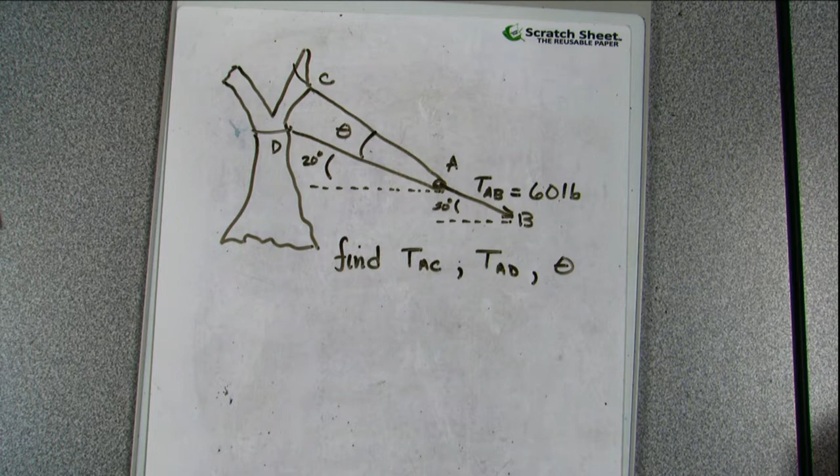That's odd that they don't accept that thermo class, because that one is pretty brutal. The reason is it's a historic thing. UCO doesn't accept it because UCO used to be only a physics-only department, and thermodynamics in physics is a junior-level course. Actually, you'll find that some institutions do two thermodynamics courses in their engineering program. They do the one that's equivalent to what we do as a sophomore, and then they do either a junior or senior level thermodynamics class, particularly if you're going into chemical engineering. You'll end up with two or three thermodynamics classes, plus a graduate one. So thermodynamics is a big part of chemical engineering. Sorry, guys, but it's an artifact of history that the engineering program at UCO has a 3000-level thermodynamics course, because they still graduate a number of physics majors, and there is no 2000-level thermodynamics for a physics major. So that's the fundamental reasoning behind it, and it works. I don't know how much harder they can make it.

That's pretty brutal. Thermodynamics is fun. It was fun, it was. Yeah, thermodynamics is fun. It's all about boundary conditions, and the boundary conditions get more and more fun as you get into processes. Yeah, so it's all about boundary conditions.

All right, so the next section in this chapter is 3 dimensions. There's no more theory than what we already have, right? It's the summation of forces in the x direction, summation of forces in the y direction, summation of forces in the z direction. No additional theory for what we're doing.

So I figured what we'll do is we'll work some problems. The review problems will come up, but I wanted to start with one that looks like this. So this is a practical problem. We're going to knock down a tree, right? But initially we're going to be in equilibrium.

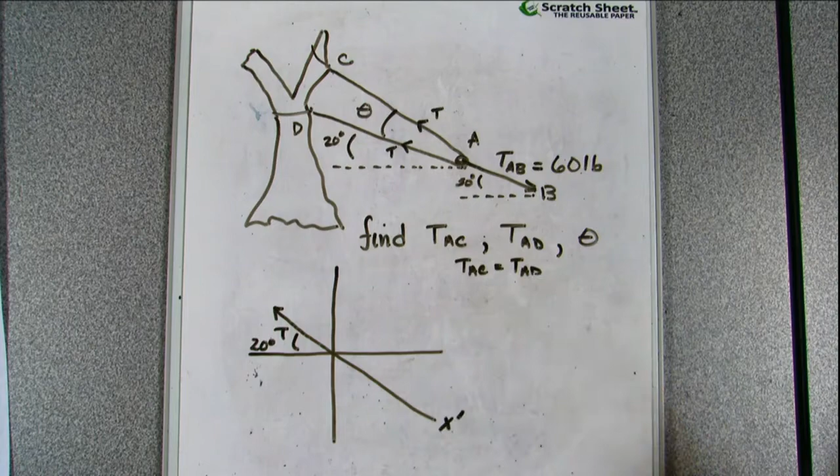And so I'm going to go ahead and put in our... wrong place, sorry. Because if I do this, this is 20 degrees, right? From my geometry, so my pull, one's going to be down here, and this will be 10 degrees. And that will be our pull. So the pull is going to be 60 pounds.

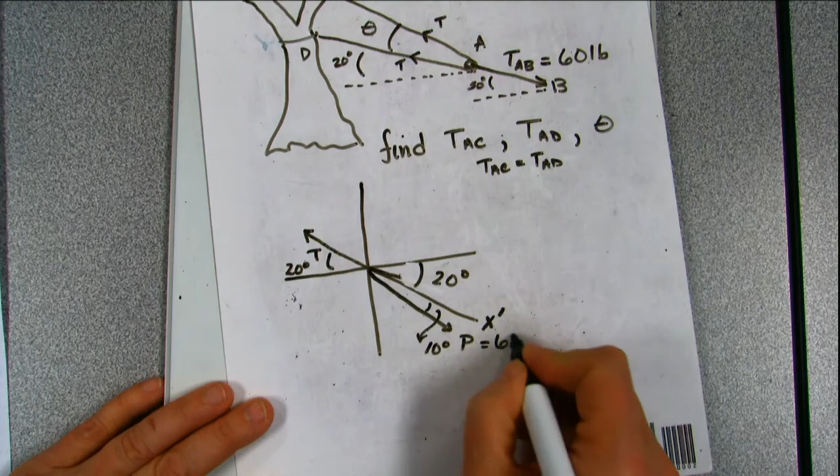Then we've got the other tension, which is someplace over here, and that has the angle between it. And then that gives us our Y prime. So we've got an X prime and a Y prime. We've just redrawn our picture, and now we can do summation of forces, right?

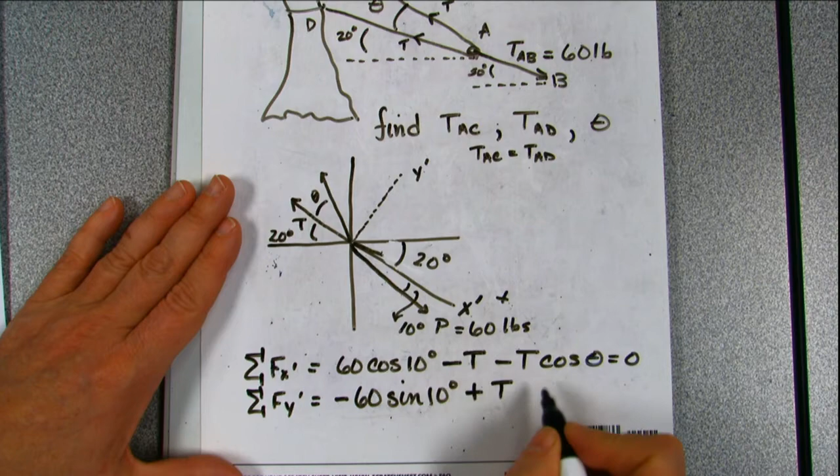So my summation of forces in the X prime is going to be this, and this is going to be my positive side, so this is my 60 pounds cosine of 10 degrees. That's all in the X direction, so that makes life really nice. And then the other one is T cosine angle, and that all has to equal 0. Then the summation of forces in the Y direction is going to be negative 60 sine 10 degrees, and then it's going to be plus T sine angle, is equal to 0.

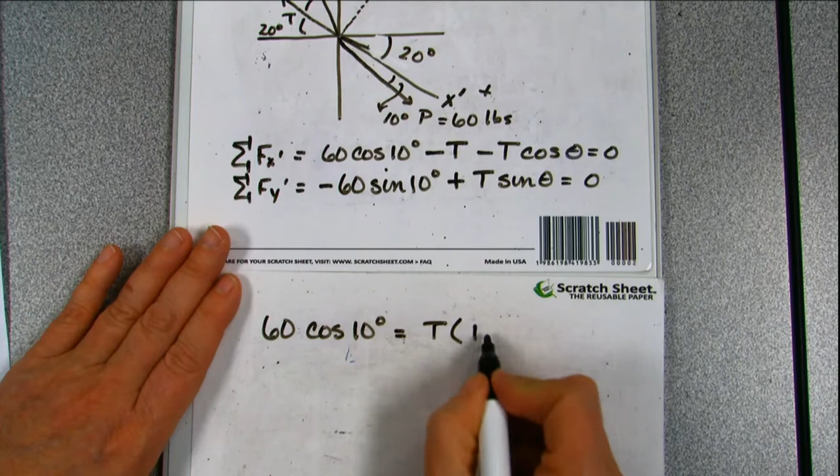Two equations, two unknowns. So I end up with 60 cosine 10 degrees is equal to T1 plus cosine of the angle. And then I've got 60 sine 10 degrees is equal to T sine of the angle.

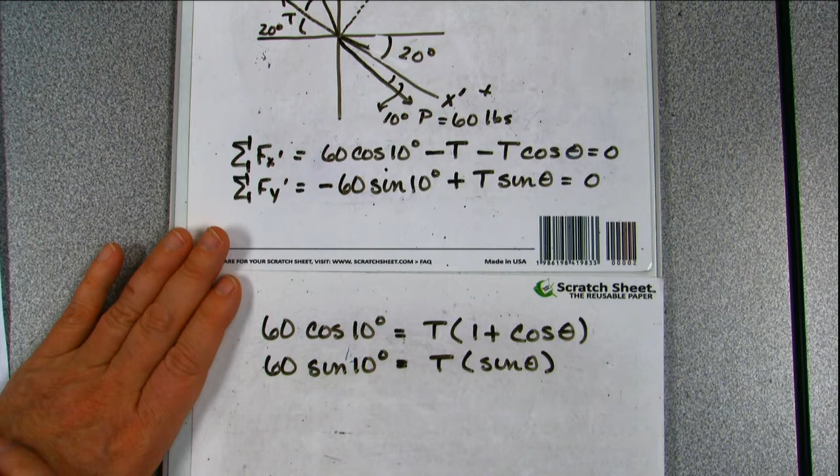So I can do one of two things. I can solve for T and substitute that in, or I can use a trigonometric identity. Let's go ahead and do the solve for T approach and see what we get.

I'm going to calculate 60 cosine 10 and 60 sine 10. So this is 59.1 is equal to T, 1 plus cosine of the angle. And 60 sine 10 is 10.4, equal to T sine of the angle. So 10.4 divided by sine of the angle is equal to T.

And then we get 59.1 is equal to 10.4 divided by sine of the angle, times 1 plus cosine of the angle. And it looks like no matter what we do, we're going to have to use a trigonometric identity.

And the trigonometric identity that the author uses is 1 plus cosine of the angle is equal to 2 cosine squared theta over 2. You can play with whichever trigonometric identity you want to use to get there, but that's what the author used.

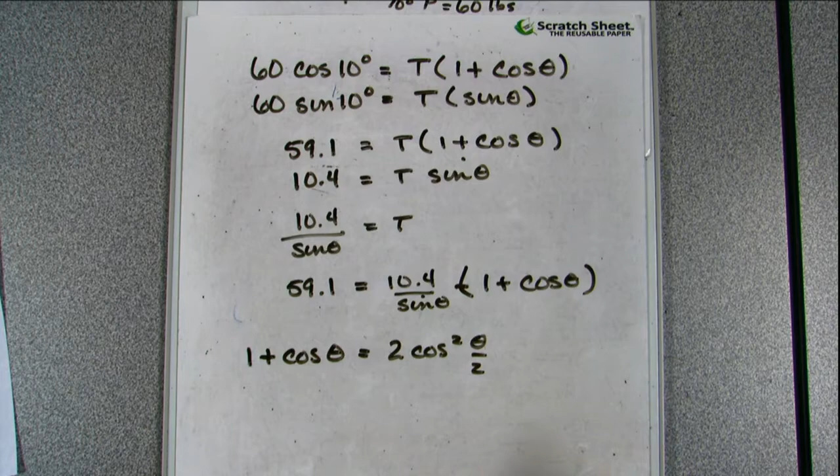And then also used, so for that one, used that one. And for this one, they went ahead and used sine theta over 2, cosine theta over 2.

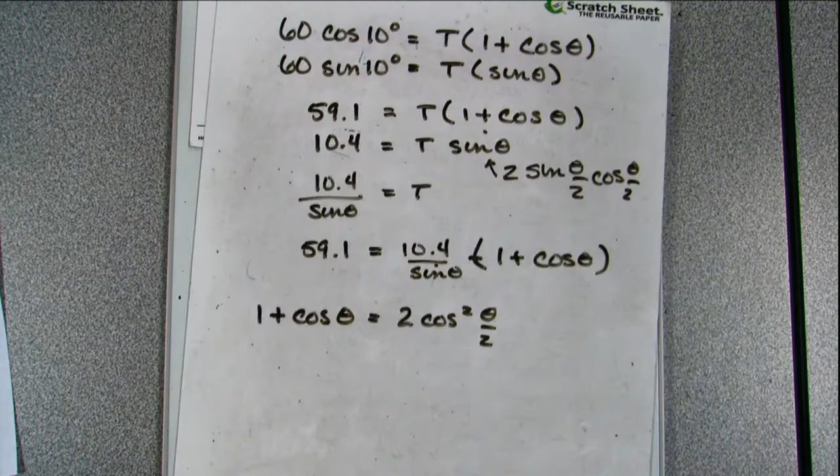So I get 59.1 is equal to 2T cosine squared theta over 2. And then I have 10.4 is equal to 2T sine theta over 2 cosine theta over 2.

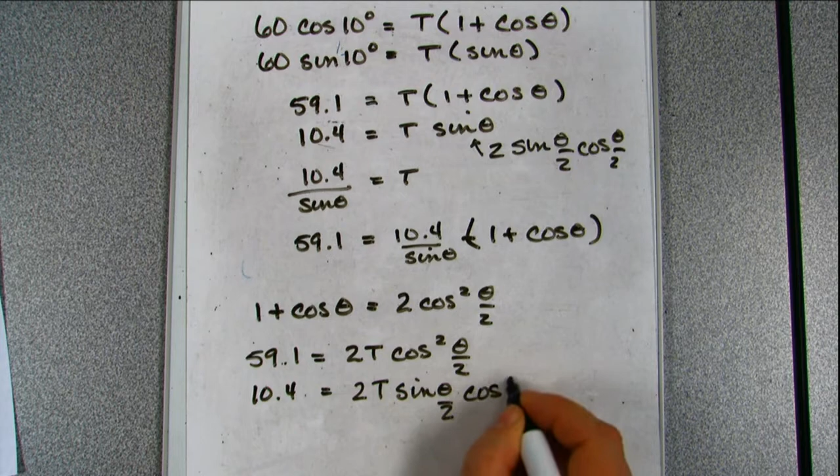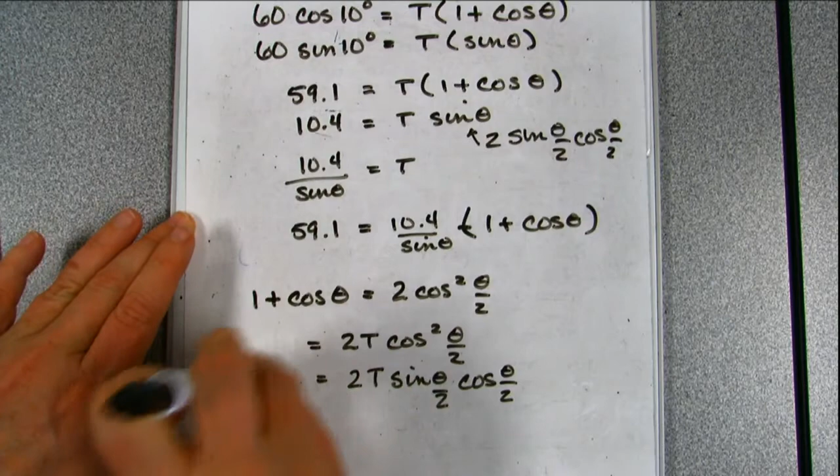I'm going to go ahead and put these back in: 60 cosine 10 degrees, 60 sine 10 degrees. I'm going to rewrite it as 60 cosine 10 degrees equals 2T cosine squared theta over 2.

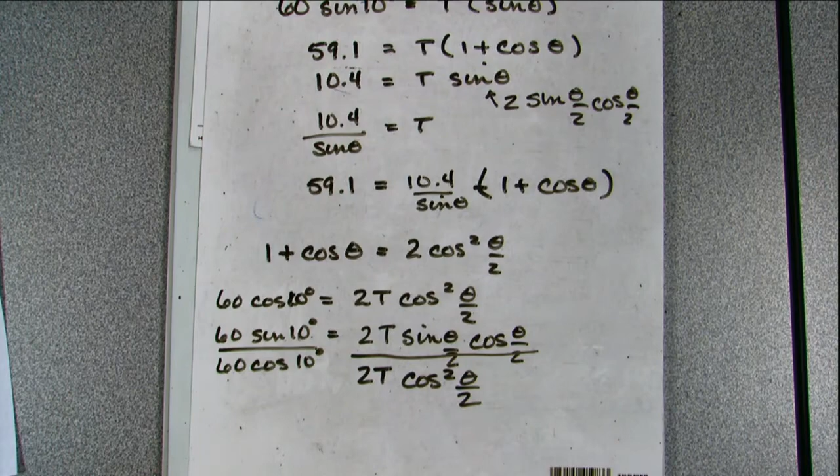Now you see why the author does it the way he does it, because one of these cosines goes away. I end up with the tangent of 10 degrees is equal to the tangent of theta over 2. Theta ends up being 20 degrees. And then T ends up being 10.4 divided by sine 20 degrees, which should be equal to about 30.5 pounds.

That's all right. How would you solve for theta if tangent 10 degrees is equal to tangent of theta over 2? Figure out what tangent of 10 degrees is and do the inverse tangent. Oh okay, yeah, that's how I do it. I was looking at it and thinking inverse tangent of 10 degrees equals inverse tangent of... but then again, you can also do it by inspection, just by inspection. If 10 degrees is here, theta over 2 has to equal 10 degrees, so then it'd be 20. Okay, so you can do that one by inspection.

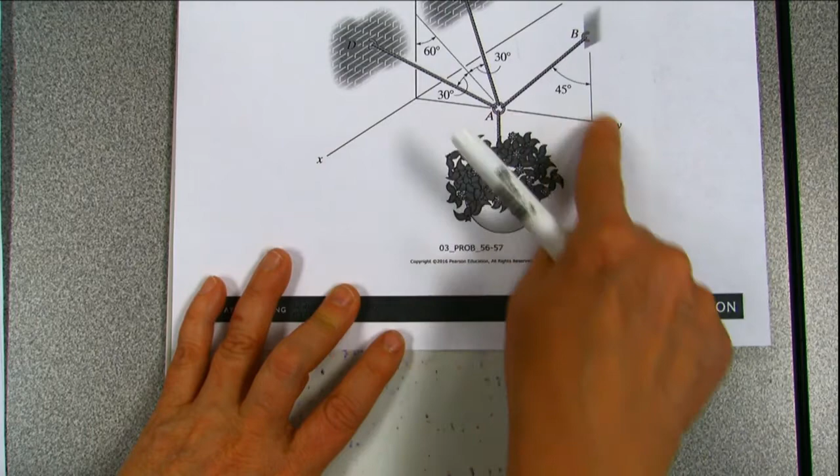Let's look at vector AB for a second. It's just in the y direction and in the k direction. That's going to make life easier, so let's go ahead and write that one down, because life is going to be good if we can write that one down.

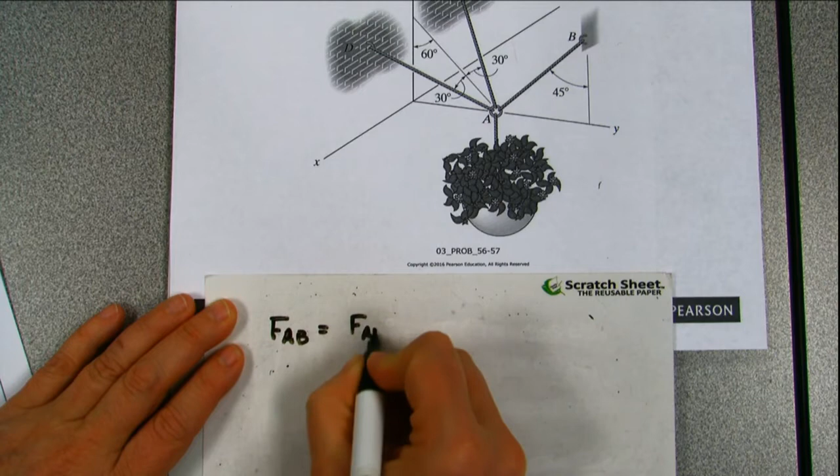So FAB is going to be FAB sine of 45 degrees in the j direction plus FAB cosine 45 degrees in the k direction.

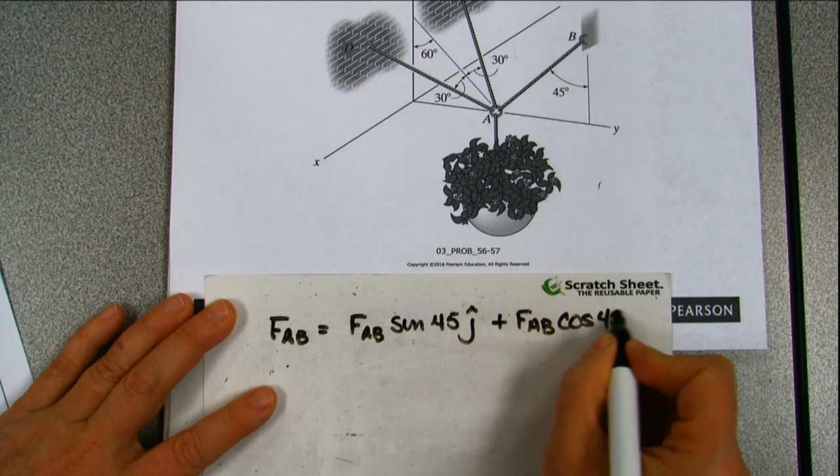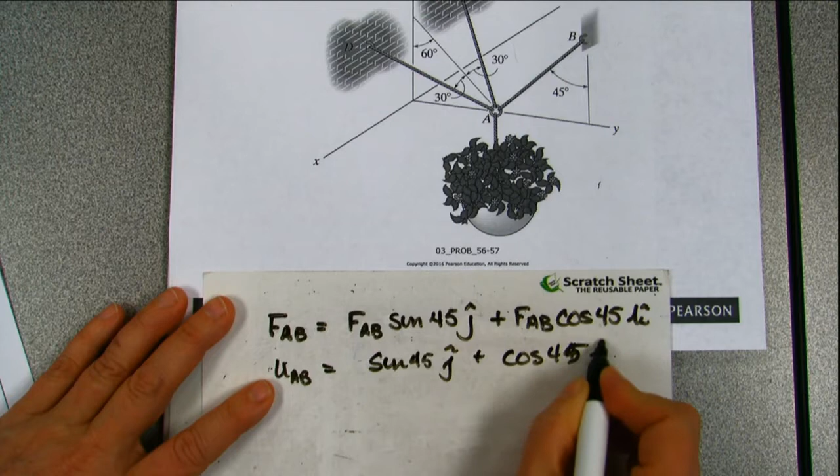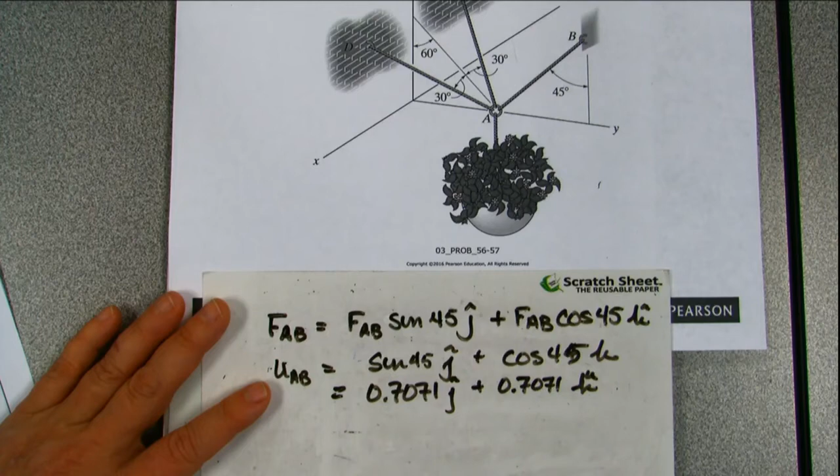And just for grins and giggles and practice, UAB is going to be sine 45 J plus cosine 45 K, just for practice. We don't necessarily have to use that for anything in this one, but by the end of the semester you should remember that cosine of 45 degrees and sine of 45 degrees is this right here. We get used to that.

Now the other two, not so much, because D and C are off of the YZ plane, but if you look at them, they're going to be the same, except one's going to be in the negative X direction, and one's going to be in the positive direction in the Y and X direction.

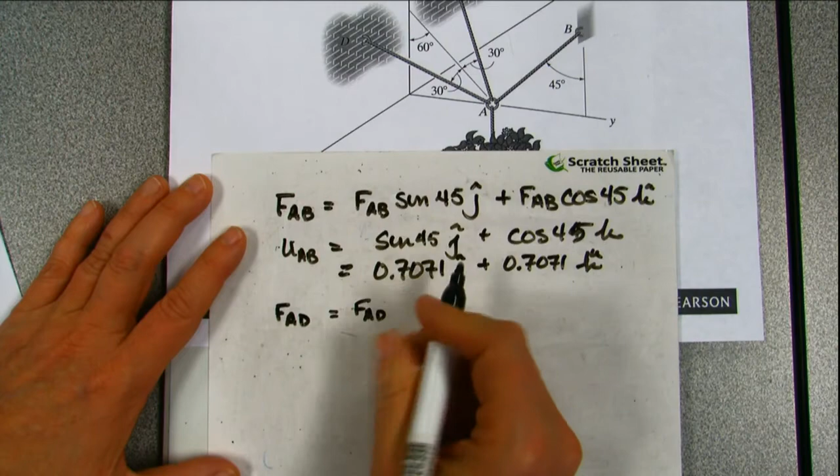So if I do FAD, and this is one of those times you may want to go back and look at it, FAD is going to be, because they've given it to us in these kind of coordinates, I'm going to get the sine of 30 degrees I.

And when I'm looking at these tensions, I want to make sure I've got that. That one's going up, so that's good, this one's going there. FAD minus cosine 30 degrees sine 60 degrees J, and that's plus cosine 30 degrees cosine 60 degrees K.

And the minus comes because we're setting this spot as the origin, even though the picture's not drawn that way.

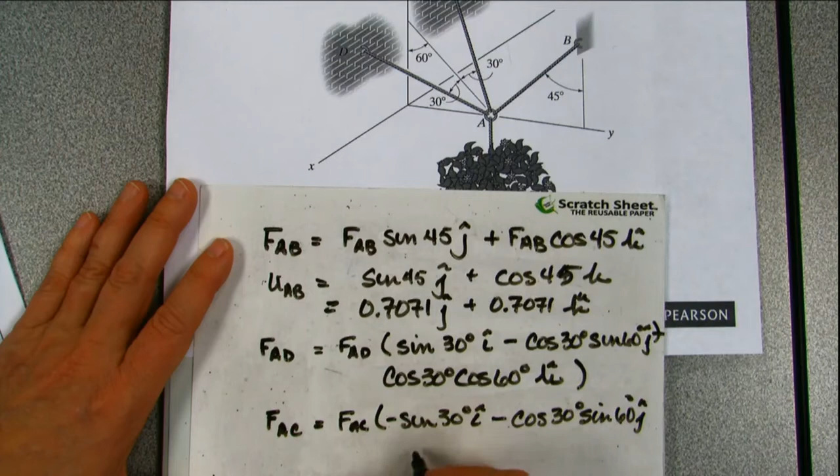And then FAC is going to look a lot like FAD, except FAC is going to be minus sine 30 degrees I, minus cosine 30 degrees sine 60 degrees J, and then we get plus cosine 30 degrees cosine 60 degrees K.

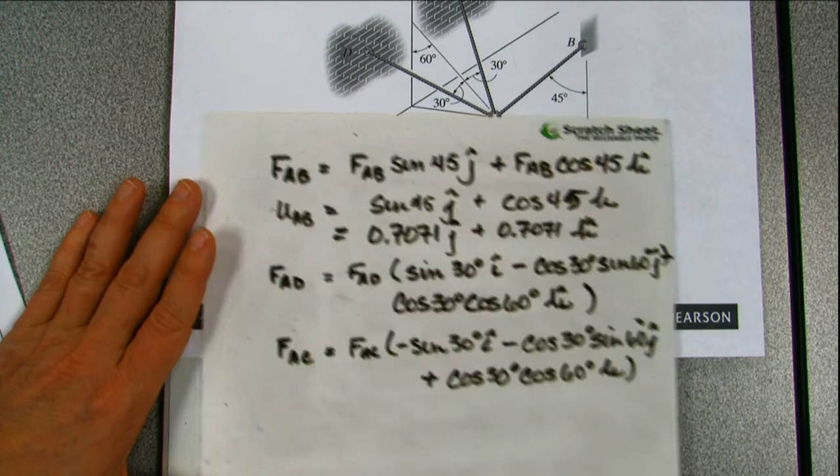So we're going to rewrite these. FAB is equal to FAB times 0.7071 J plus 0.7071 FAB K.

FAD ends up being 0.5 FAD I minus 0.75 FAD J plus 0.433 K, and FAC is minus 0.5 FAC I minus 0.75 FAC J plus 0.433 K. And then we have the weight is equal to 25 times 9.8,

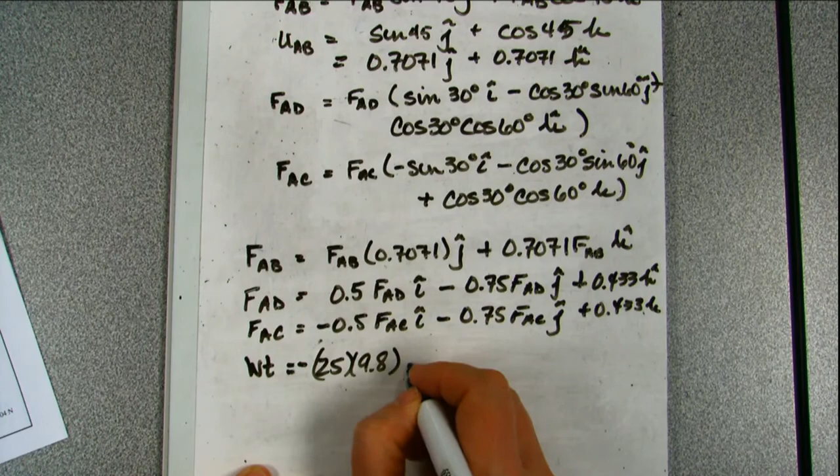times 9.8, and that is negative in the Z direction for the picture. It's negative in the Z direction for the picture, if you go picture there, that way.

So now you just do the summation of forces. Summation of forces in X: 0.5 FAD minus 0.5 FAC has got to equal 0. So FAD has got to equal FAC.

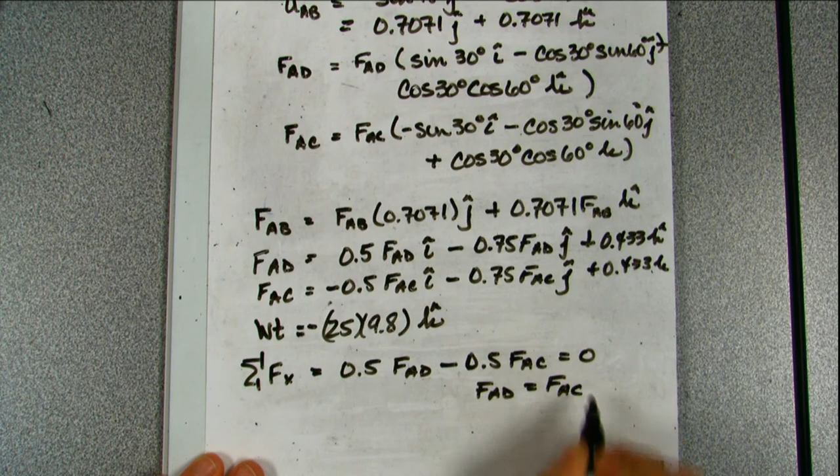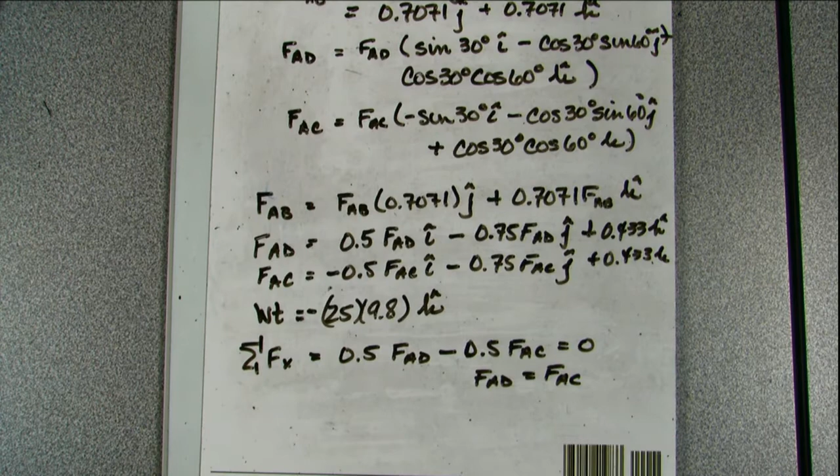That's going to be helpful. Oh no, there was no I in it. There's nothing in the X direction on that one. And so that's also when you start looking at these problems, if you're given a problem that's not like the book problem, pick your coordinate points, because it's going to help you out.

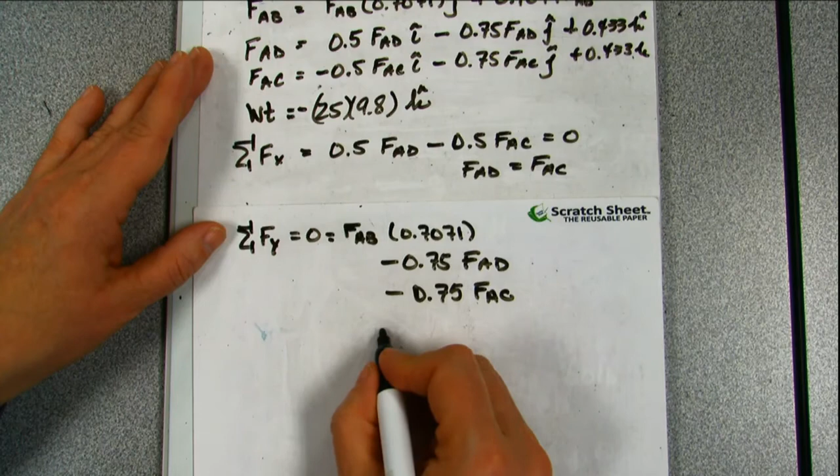So now we do summation of forces in the y direction, it's got to equal 0. In this case we've got FAB times 0.7071 minus 0.75 FAD minus 0.75 FAC, but we know FAD and FAC are the same, and we have a minus, and that works out to be 245, 25 times 9.8. No, that's in the K direction, never mind, we're in the Y direction.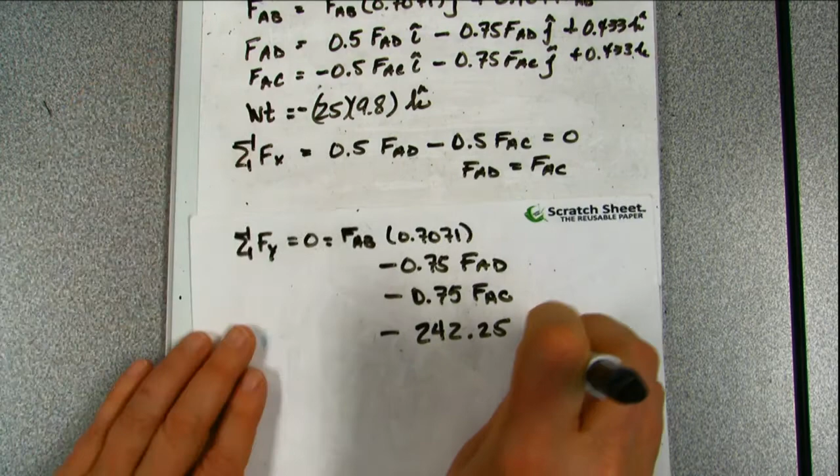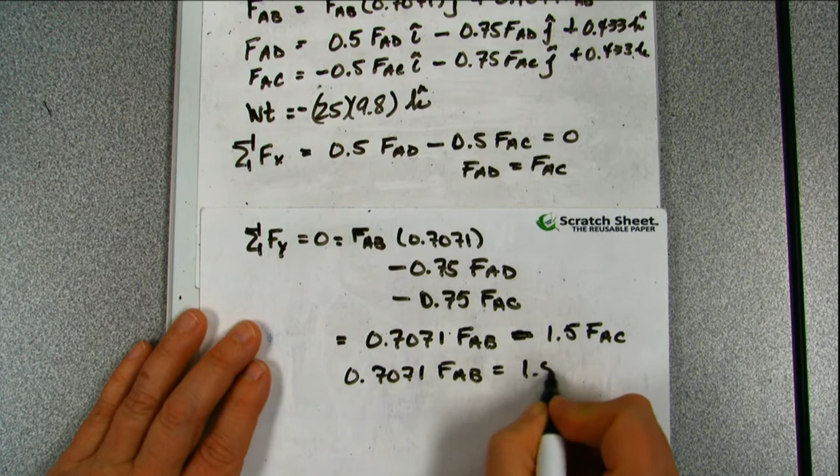So I get 0.7071 FAB is equal to minus 1.5 FAC, just for grins. 0.7071 FAB equals 1.5 FAC. FAB is equal to 1.5 FAC divided by 0.7071.

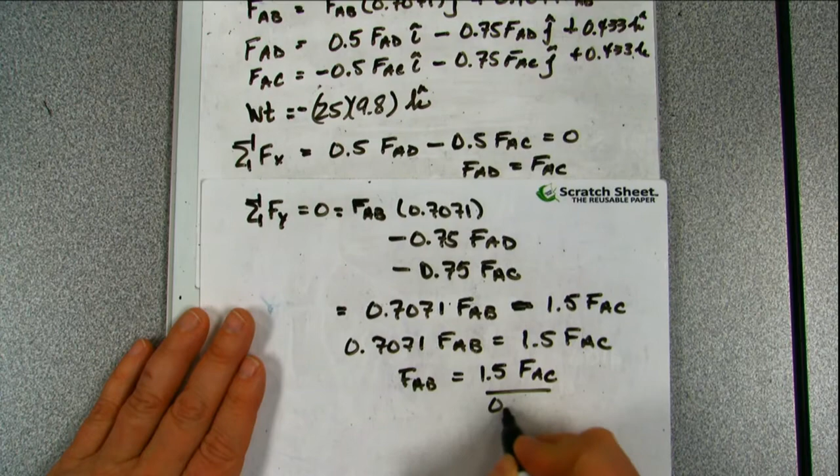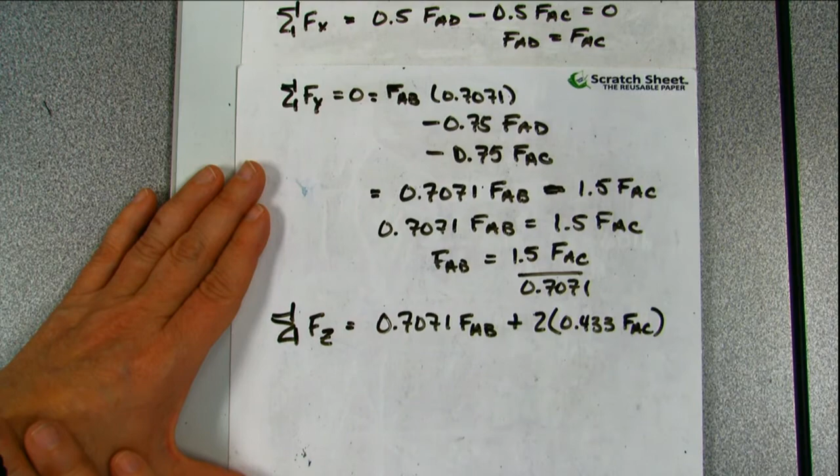Now we do the K equation, and that's 0.7071 FAB plus 2 times 0.433 FAC. Because it's easy, we can go ahead and do that. Everybody see that I got two of those right there? And we know AD and AC are the same, so I just shortcutted a step.

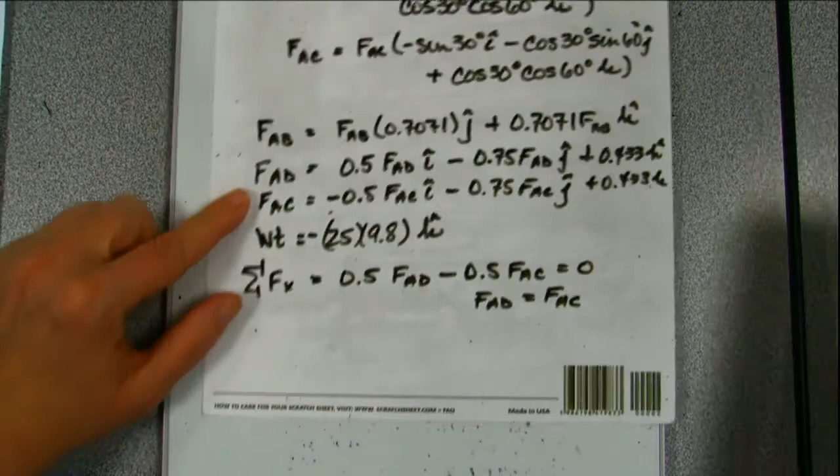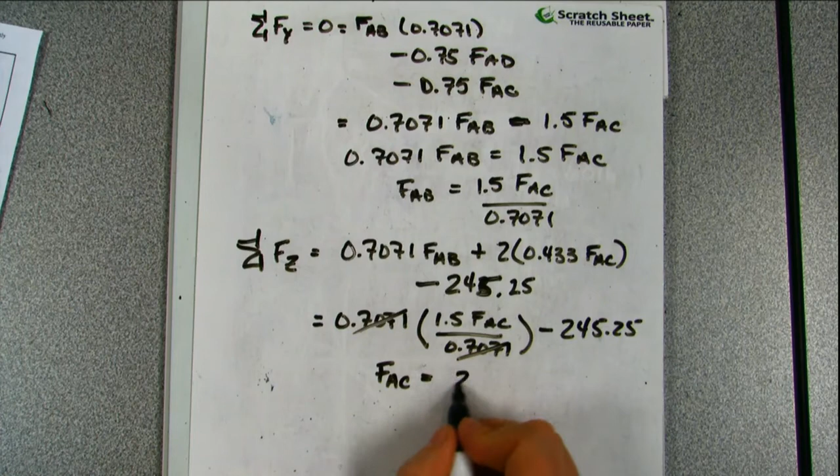That's minus 242, or 245.25. We know what FAB is, so we can plug in for that. That's nice, that makes it nice. FAC is equal to 245.25 divided by 1.5.

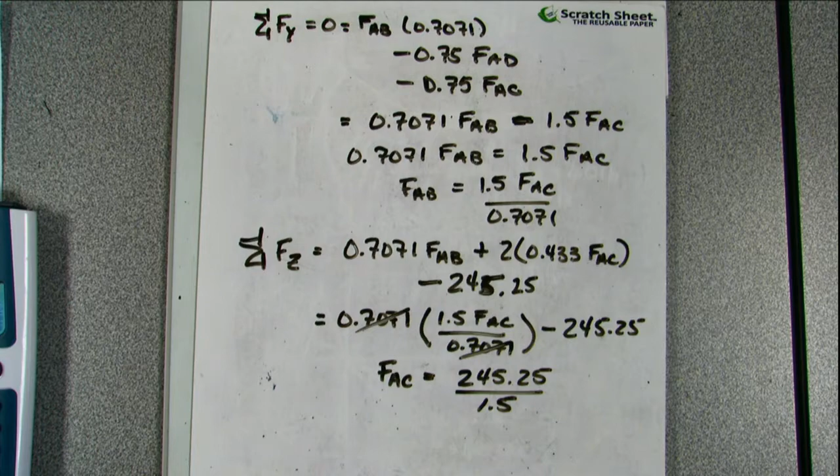What did I do wrong? Oh, forgot that part right there. Wait a second, something's not right. We left out a term.

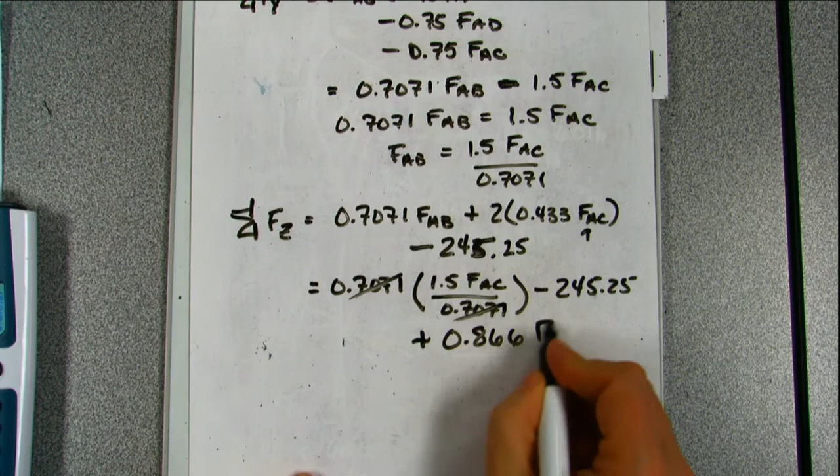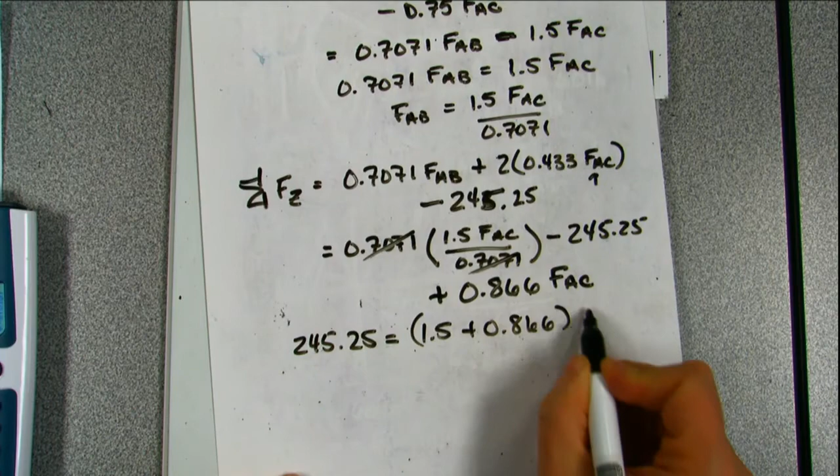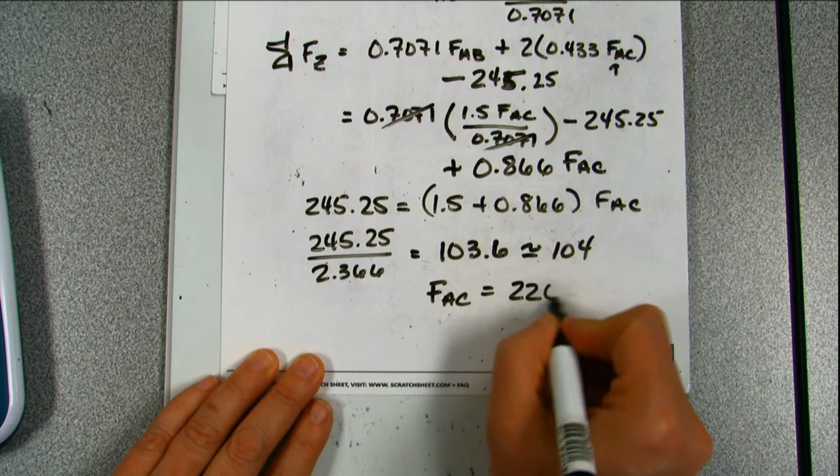So we get 245.25, 1.5 plus 0.866 FAC. We get 245.25 divided by 2.366 gives me 103.6, which is approximately 104. Then we can plug it back into that one. 1.5 times 104 divided by 0.7071 gives us FAC is equal to 220. And those are both in newtons.

Seems like the hardest part is just keeping track of the negatives and the directions. The hardest part is getting the unit vectors. Fundamentally, the hardest part is getting the unit vectors, and you're trying to read the picture. Yeah, that's pretty hard.

And that's fundamentally it, because if you look at this one, we got a traffic light. So we got a traffic light. That's why I said, when in doubt on these things, draw your force diagrams, okay? That's the first thing, draw your force diagrams. And then the next part is draw your unit vectors. So for this one, we're going to take H, given H that's in the middle, is going to be 4 meters. And we want to determine the tension in the cables if the traffic light is 15 kilograms.

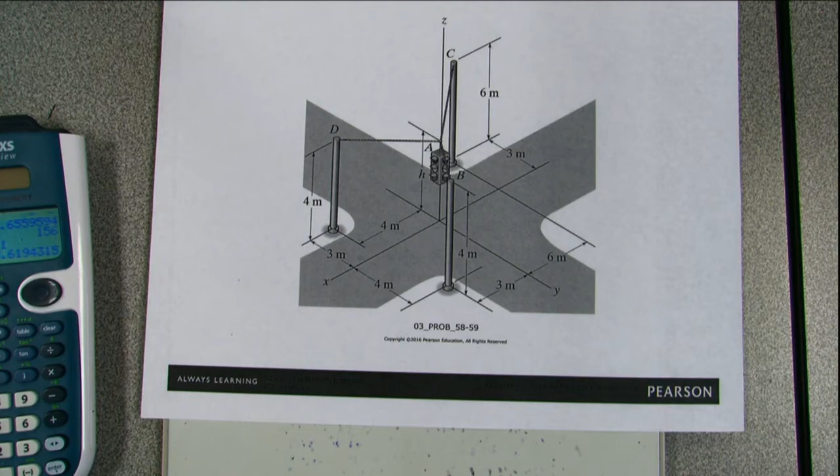So the first thing you want to do is find the unit vectors. So we're going to do AB, okay? We're going to do AB. So what we've got for AB is we know that this is my X direction, okay? We're going to be at the center here. So how am I going to do this?

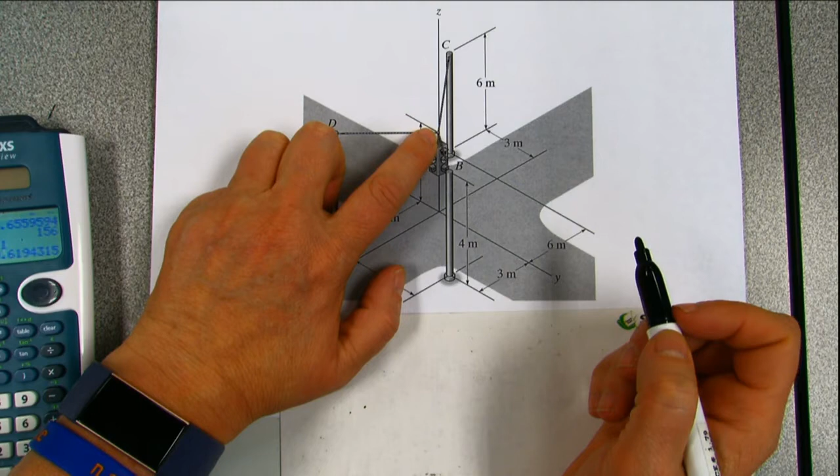How do I do this? I do AB. Okay, if we make this my origin, okay, so there's my origin there. These are at 4, okay? These are at 4 and C is at 6. So that's one of the things that we've got to do. If I make that my origin,

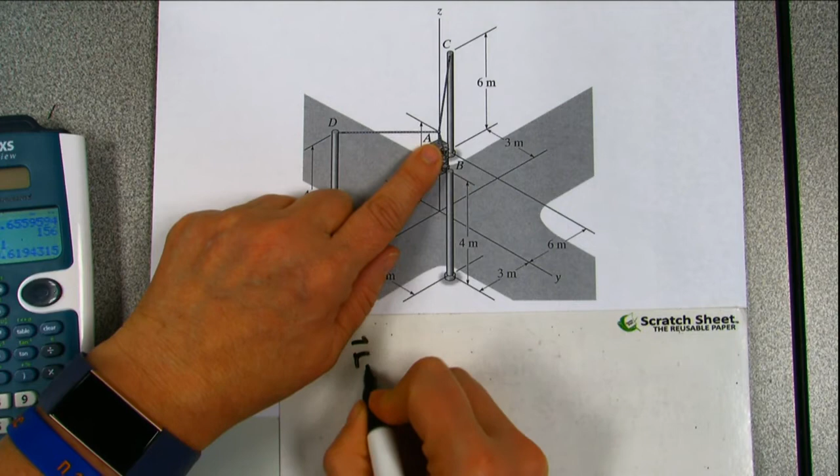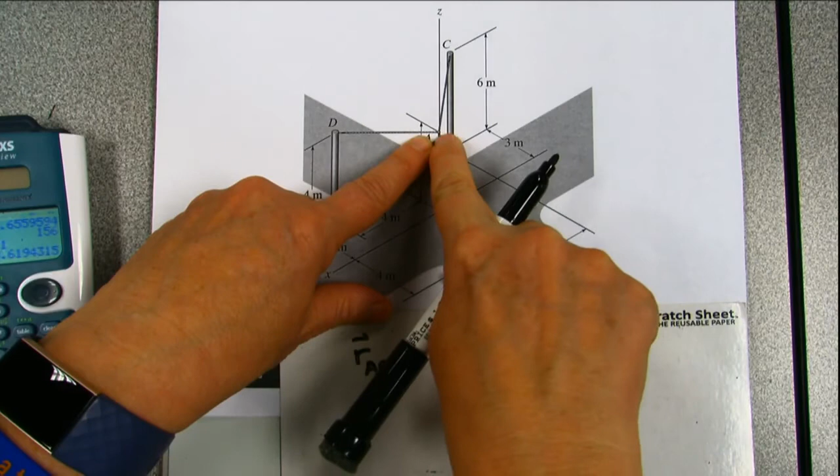RAB has got a 0 in the K. Everybody okay with that? If I make this my origin, these are 4 meters, 4 meters, this one's 6 meters. And if I have that as my origin, that's going to have a 0K. We're not going up or down in the K direction. When I do RAC, it's going to have +2 in the K direction.

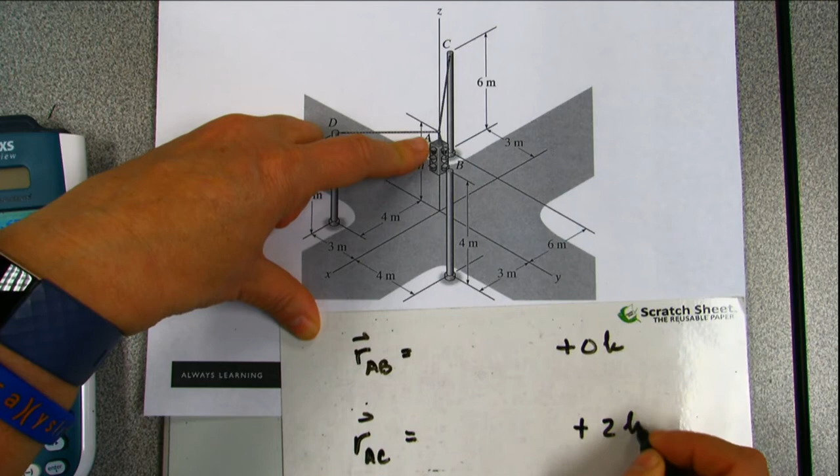And RAB is going to have 0 in the K direction from my picture, if H is equal to 4. I don't have any, and we're given the problem that H is equal to 4. So I don't have anything in the K direction.

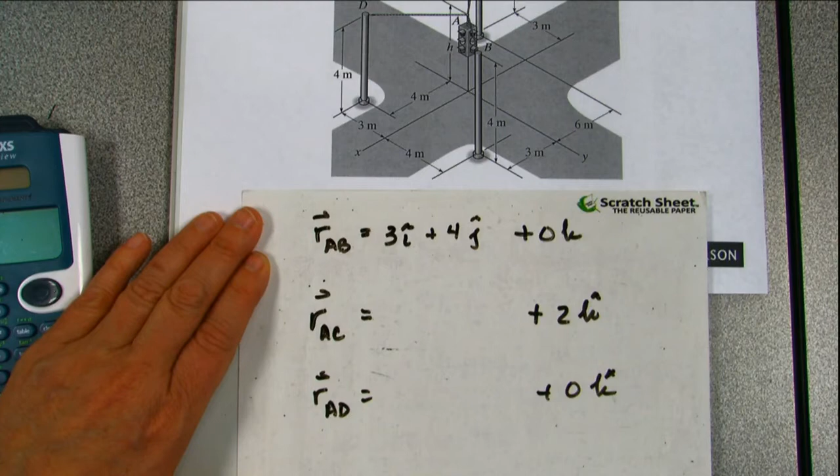Now all R is a position vector in my space. So if I do that, then I have 3 in the I direction, because there's my 3 in the I direction, and I have 4 in the J direction. For RAC, I end up with -6 in the I direction, and I end up with -3 in the J direction. And then for RAD, I end up with -3 in the I direction, and I end up with a +4 in the J direction.

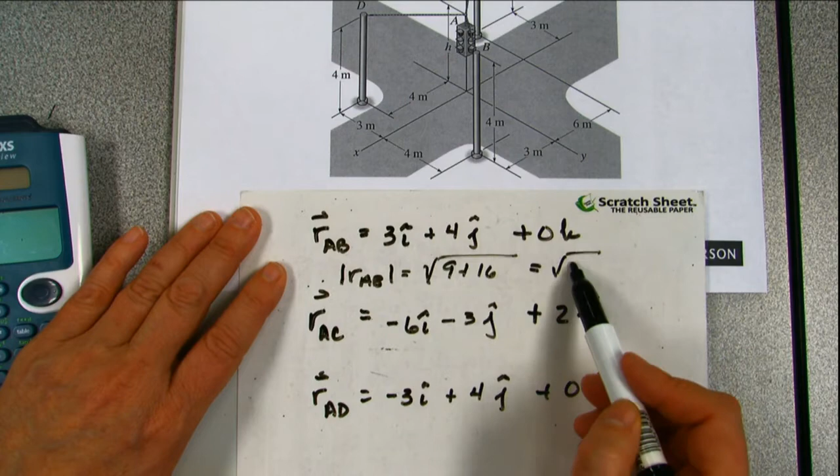So now what I want to do is I want to find the magnitude of RAB. That's the square root of 9 plus 16, equals, did I do that right? Should be. 9 plus 16, 25 equals 5. So UAB is equal to 3/5 I plus 4/5 J.

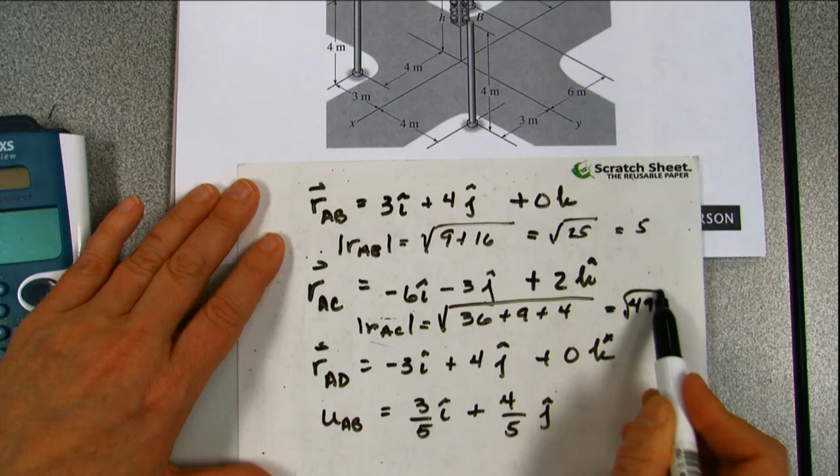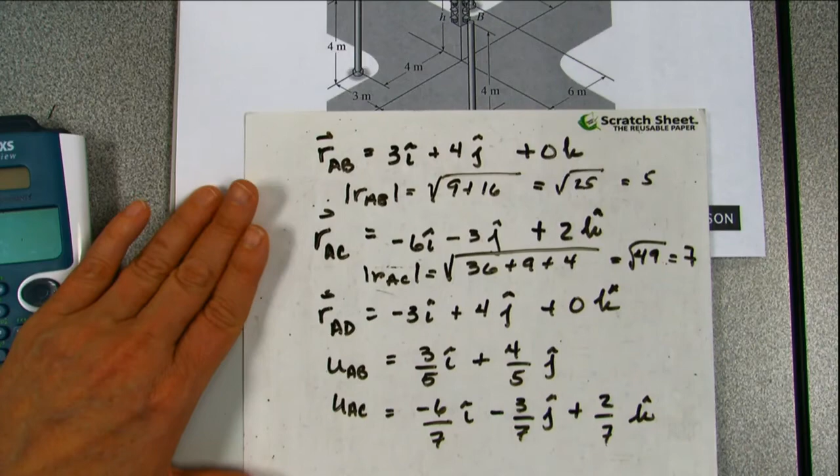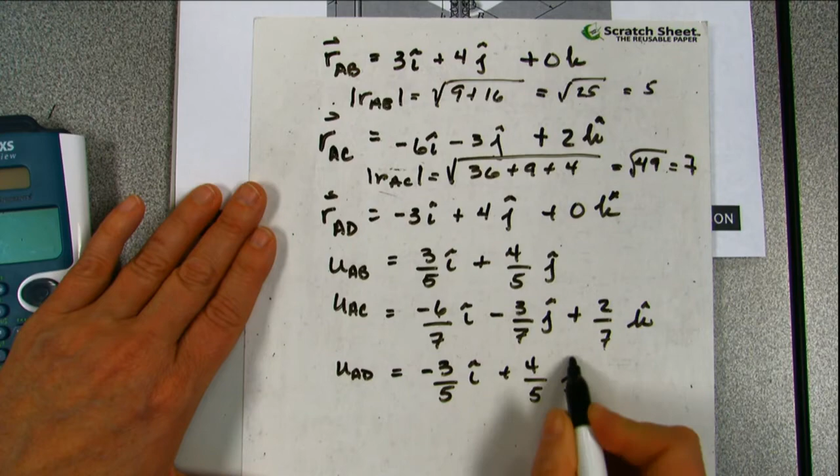Magnitude of RAC, square root of 36 plus 9 plus 4 is equal to 49, which is equal to 7. So UAC is -6/7 I, -3/7 J, plus 2/7 K. That one's 5 again, so that makes life a lot easier. We just have to go in and do it, except that's -3 in the I direction plus 4 in the J direction. So now I've got my unit vectors.

And now you just plug in your forces. So my force vector AB is force AB, UAB, which means it's 3FAB fifths in the I, plus 4FAB fifths in the J. And we do the same for each one.

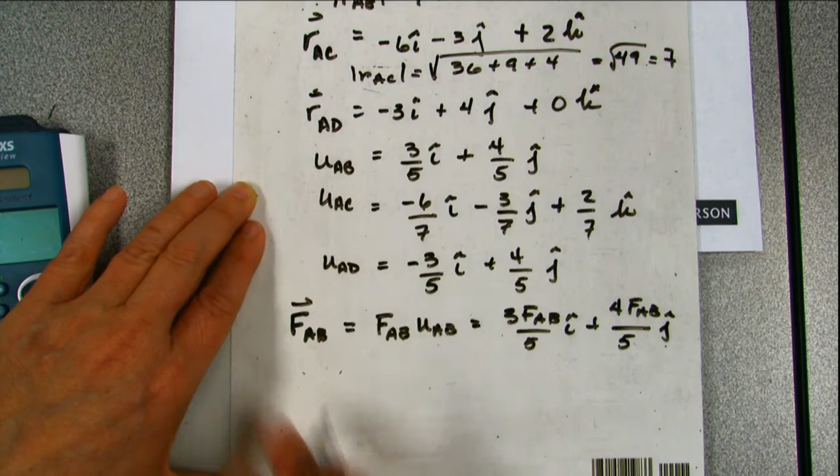And I'll give you the answers so that you guys can work it through yourself. FAB is equal to 441 newtons. FAC is equal to 515 newtons. And FAD is equal to 221 newtons.

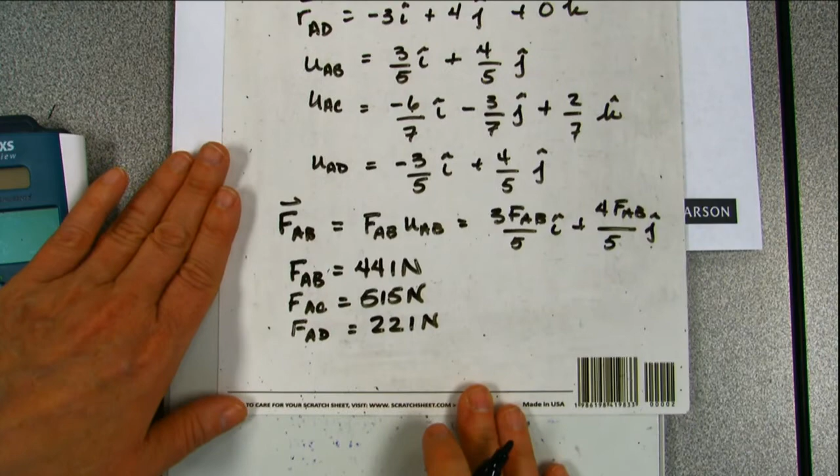Again, fairly straightforward. The tough part is finding the unit vector. The tough part's going to be finding the unit vector for each of those vectors.

Would we figure the tension by starting with the weight of the traffic light? Yeah, because you've got these are the 3 cables here, but you do have the weight of the traffic light going down. And we don't have any of the tensions in the cables, but you know that that's 15 kilograms. So you do sum of your components in the X direction, sum of the components in the Y direction, which means you have 3 equations, 3 unknowns.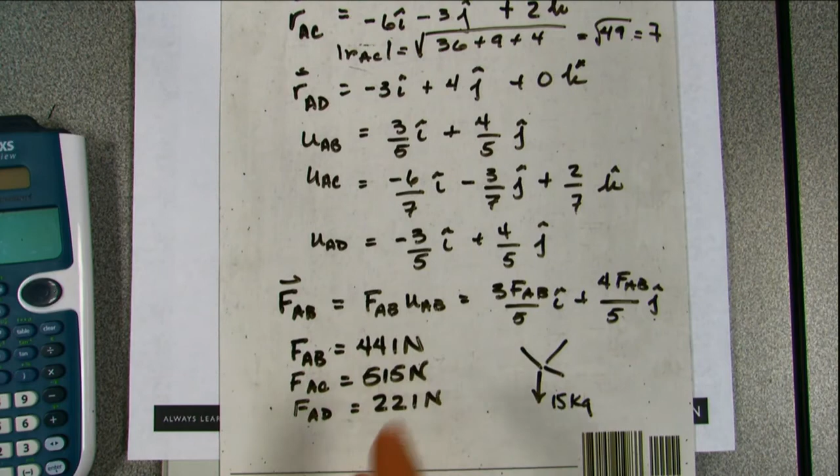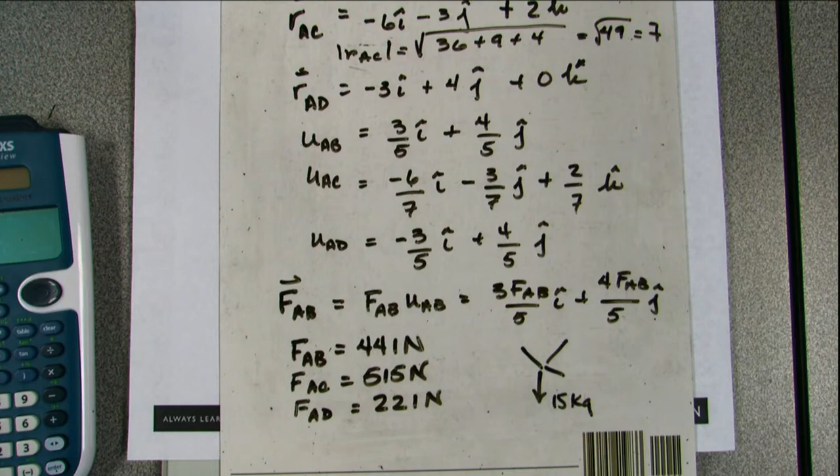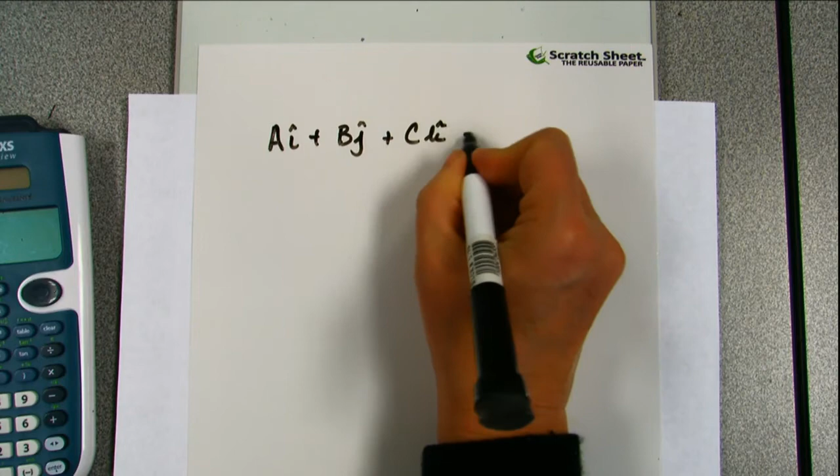Now remember, there's a couple of ways to do 3 equations, 3 unknowns. Remember, there's the determinant method. Some of these are not going to be nice and neat with just 3. With 3 you can work through and do it algebraically, but if I have AI plus BJ plus CK equal to some value D...

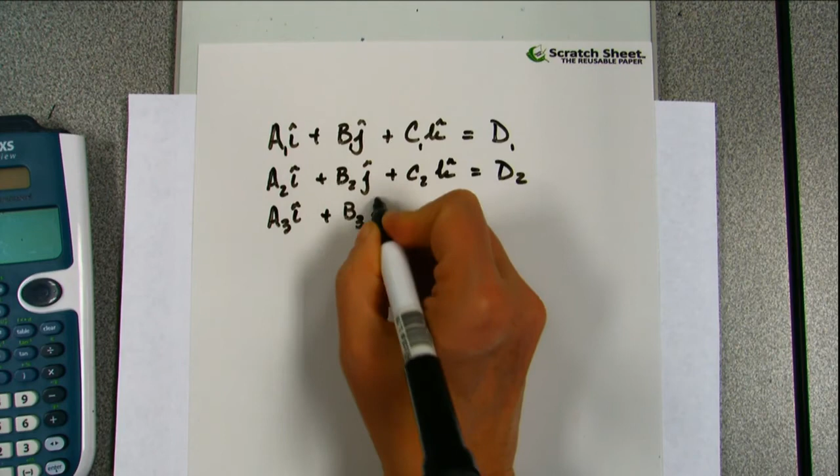And I'm going to do the 1, 1, 1 thing. And I have A2I plus B2J plus C2K equal to D2. And A3I plus B3J plus C3K equal to D3.

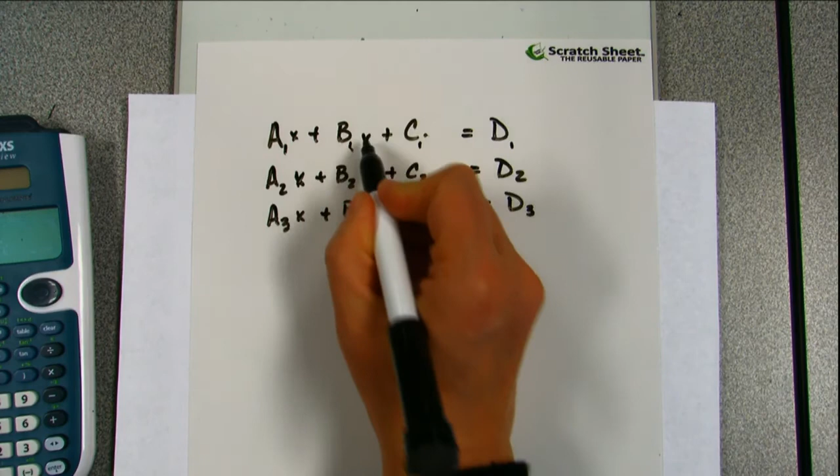Remember, we could have done this, and I'm going to give it to you algebraically. So if this is X, Y, Z, X, X, Y, Y, Y, Z, Z, Z, we get this matrix: A1, A2, A3, B1, B2, B3, C1, C2, C3.

And if I want to solve for one of these, remember what I end up doing. If I'm wanting to solve for A, or for the X component, what I do is D1, D2, D3, B1, B2, B3, C1, C2, C3, divided by this puppy in the bottom. Remember that? Last place we saw that was when we were solving loop equations in Physics 2.

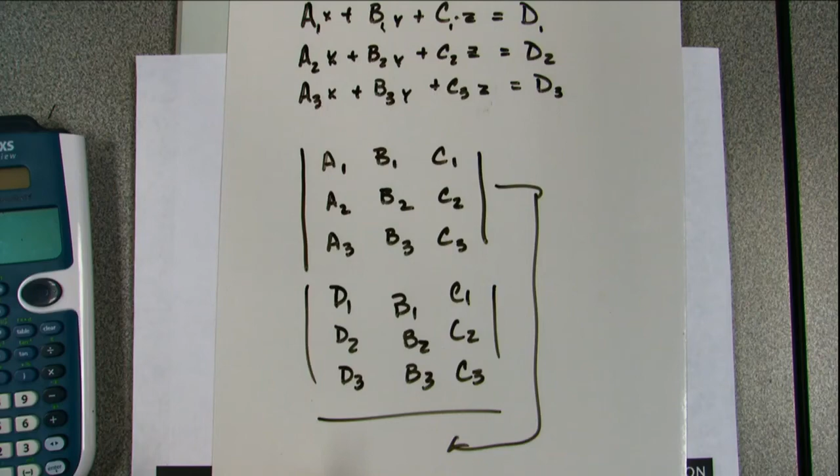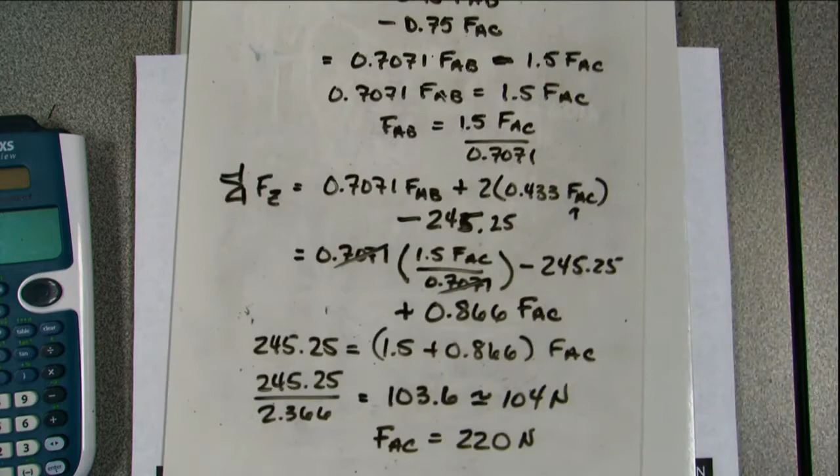So if I get to multiple equations, for these, doing 3 equations, 3 unknowns is not a big deal. We can do the substitution, but if we start adding more and more vectors, we're probably going to have to move to the matrix system like this in order to solve it.

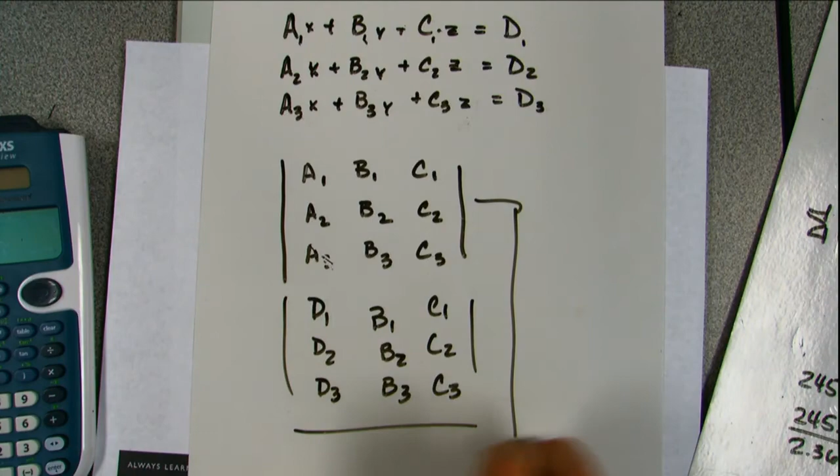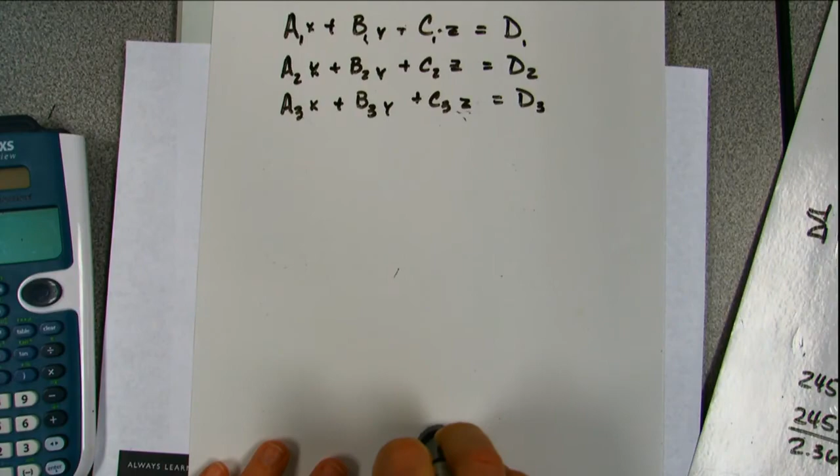This is called the determinant method. And when you guys get into circuits, you're going to want the determinant method. So for those of you who have to take circuits, that's going to be one of the bigger tools in your toolbox.

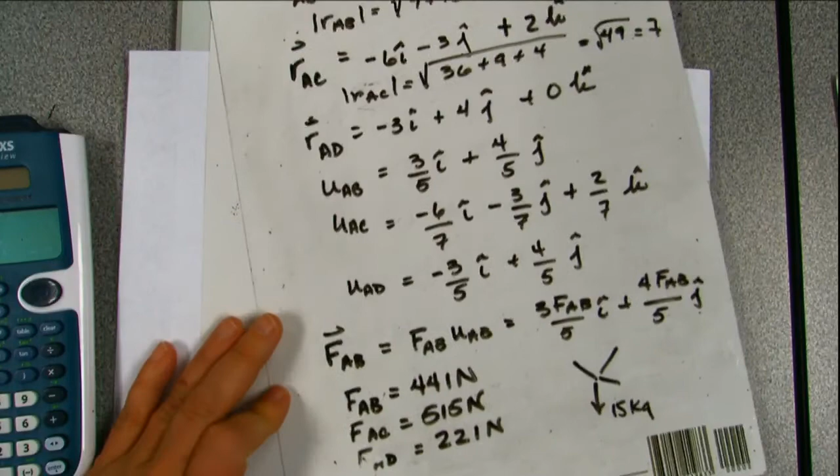Okay, are we good? This all making sense?

So where do you find the solutions for those? In the book? I gave them to you. Yeah, it's just in the back of the book. Because I'm not finding, I'm only finding like 2. It's like indices, well, or something, yeah, like in the appendices. You get solutions.

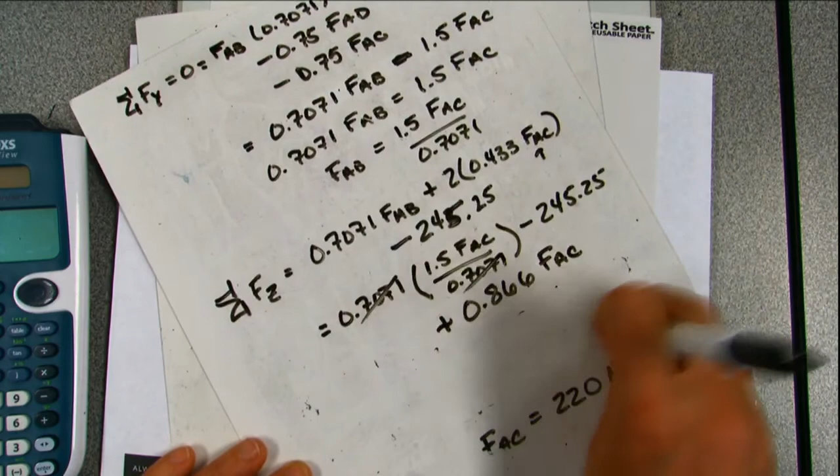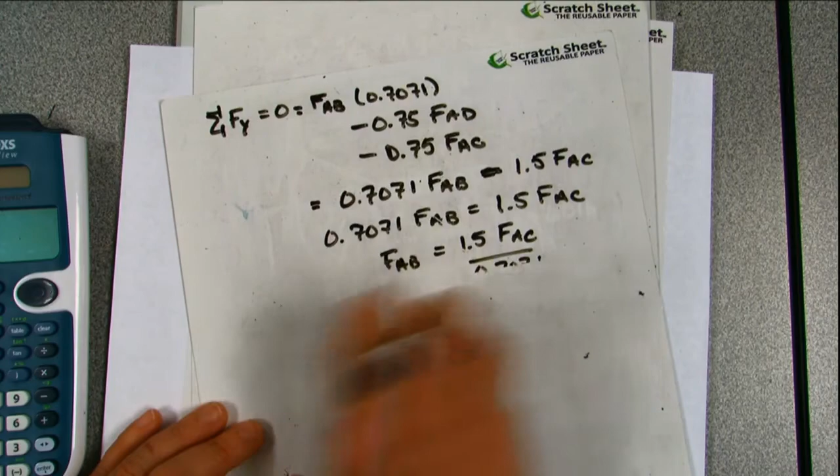Now they only give you selected problems. They always give you the review problems. They give you the fundamental problems. Yeah, not all of them, just selected ones. They don't give you all of the other problems. But that one you just showed us had all of them, the whole thing on there. Because it's your teacher edition? Yeah.

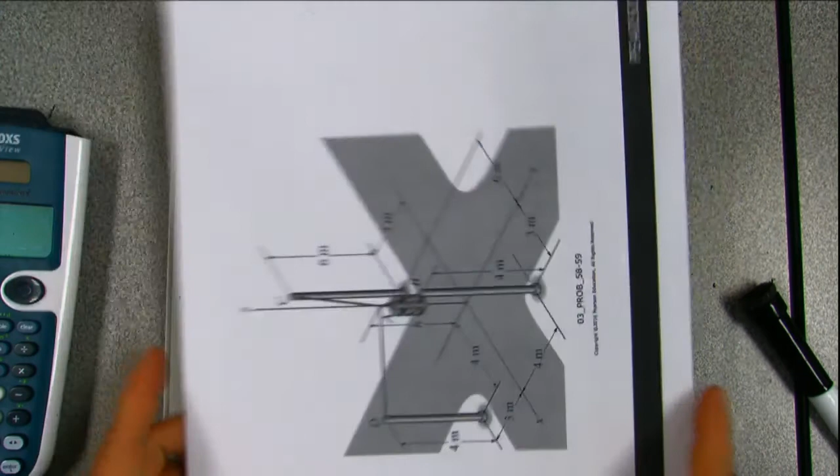So are we gonna be able to get a hold of some of your notes or? No, I wrote it out. So can I buy the teacher edition? No, but in the back of the chapter, all the review problems have their solutions. Yeah, they have all the answers. No, the review problems actually have the solutions. Remember, you have fundamental problems, preliminary problems, and review problems.

The other ones just give you the answers. But the review problems actually give you the solutions. These are pretty short, they don't necessarily give you every step. But even look at this one — that's basically what it gives you in the back of the book. It just gives you the unit vectors, the sums, it doesn't solve it for you.

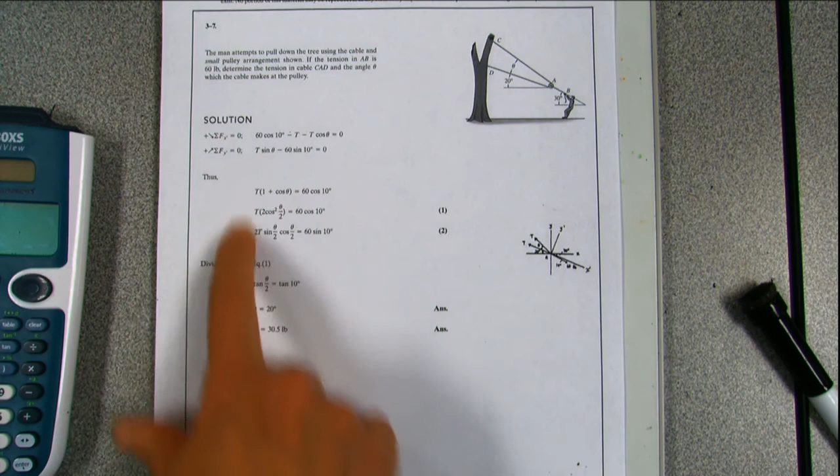Yeah, they leave the algebra to you. They always leave the algebra to you. Don't the fundamentals show the algebra sometimes? Because this one, the one we did here, was trickier since we did the solutions with the sine ones — they actually gave you more of the inner steps. But this is a back of the book problem.

What was the problem number for the hanging plant one? The hanging plant one I did was problem 56. The one you have in your homework is problem 57. Okay, I'm just trying to write these down so Kayla knows which ones to look at. And the tree problem is 3-7, and the traffic light problem is 3-58. Thank you.